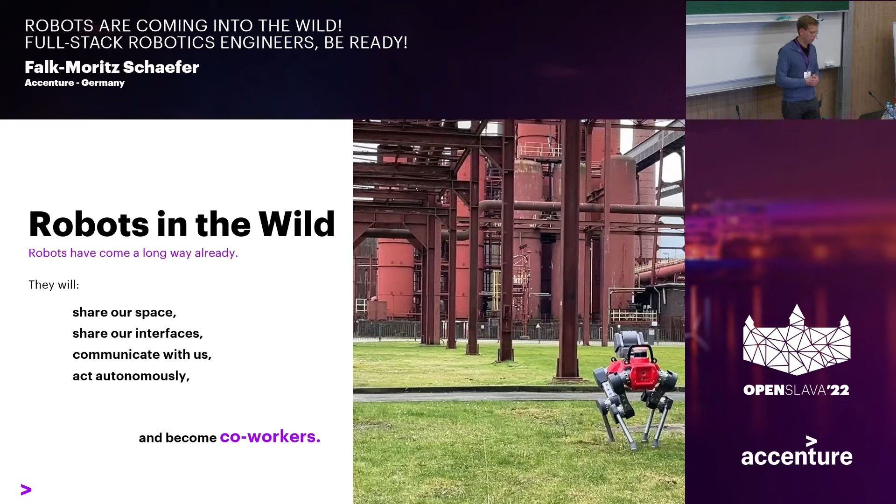This is happening across the board in what we call service robotics - robots used not for manufacturing but for services, usually where humans do those tasks today, augmenting humans rather than replacing them.

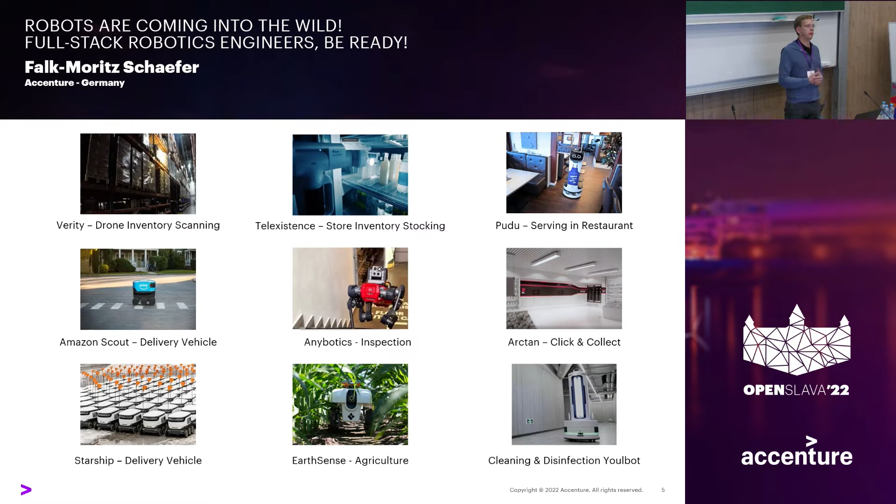So that's really substantial business and investments going in there.

And that's for one reason: from a technology maturity curve, we are just not there yet to have that reliability in the robots today to actually physically manipulate stuff. Probably you know from your own products and projects, it's very hard to engineer something to a point where it's actually ready for the real world, for real life. And that's so true for robotics.

Look at Roomba. It took 12 years to develop a very simple cleaning robot in the consumer market to that price point and that reliability that they actually hit the market nerve. And that's true in this space.

And that's also why we see the first adoption of those robots in the wild being used as a mobile sensor. This is something they already today can do very reliably, very well, moving around, getting data for increasing transparency of what's happening. And this is already powerful enough because there are a lot of tasks that are repetitive, dangerous, dirty across different enterprise application areas.

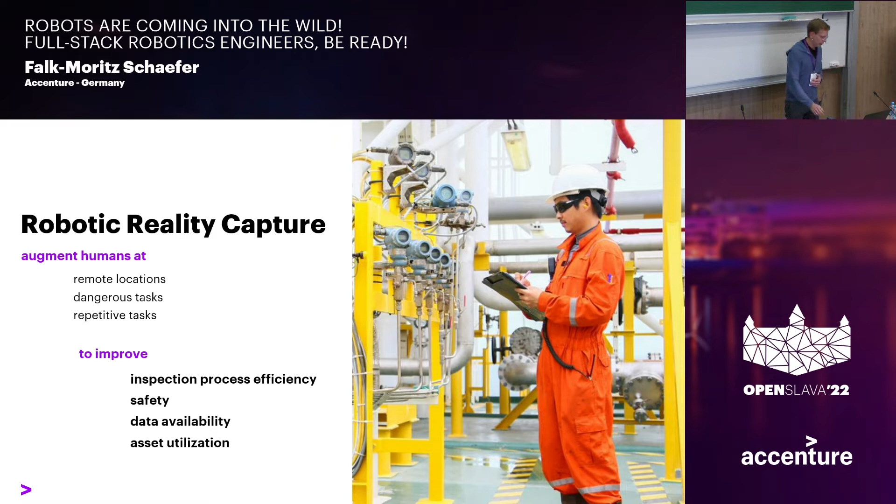So often it's not anymore the question if there is a business case for those kinds of applications, but only how to get there. And what are the tasks a robot can do in that area?

If we talk about reality capture, inspection, first of all, they can check that everything is still okay. They have powerful sensors that can go to every location at the right point in time and check that everything is still in order.

They can also read out analog devices, something that you would never retrofit to be connected or digitized at this point because those assets have been there for a couple of decades already. So they can take a look at those analog displays, read out the values, and that way you get a lot more data than before.

They can check if valves are at the right position, for example, at a chemical site. They can collect additional data for maintenance purposes, for example thermal information of heat exchangers to check if they are still efficient or need to be replaced. They can look at rotating equipment with a microphone because they have very characteristic sound profiles, and you might detect that something is going off before it happens.

And then we look at things like a plant street view, something from Google Street View, right? Having that, but on a daily or an hourly basis.

So you can do regular scans, you can explore the site without being there remotely. And then we look at telepresence, so you can have a physical eye on the ground without leaving the control room, without leaving or even traveling to the site. And safety, obviously, is very important, and security as well. They can even check the perimeter if there are intruders, or check that safety equipment such as fire extinguishers and so forth are there.

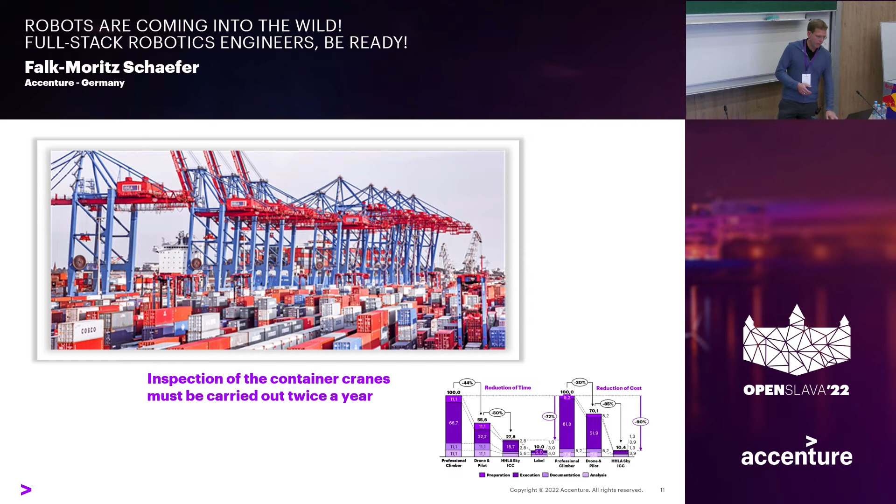But the interesting part here from a tech side is not that somebody is flying a drone and controlling it, but it is fully autonomous. And that's where we see it going. So the drones can pick up fully autonomous, find the container crane, do the inspection flight, get the data that is needed, come back and land autonomously. And we got the flight permission from the flight regulation there in Hamburg, and it's actually working, so it's a really working solution.

That's one thing. And the other thing, it's end-to-end integrated, meaning we have ServiceNow for scheduling and requesting this inspection. We have the flight operator platform where fine-tuning is done, looking at the weather, communicating with the flight regulation, and the drone operator just needs to check that all the stuff is in order, put in the new battery, and then click a button and the drone goes off.

And then Optelos for data management, so you get all the inspection data. We developed a custom corrosion detection algorithm that was quite easy because those are painted blue, so you see corrosion in red, usually very good. So that was quite simple in that case, and it's working. Then you get automatically a pre-selection of those images, and the maintenance professional just needs to look at the subset of this data and then can trigger automatically tasks for the maintenance teams in ServiceNow, which can then get their order to do this in the next week, right? So this is autonomous operation and full end-to-end integration where we see it going.

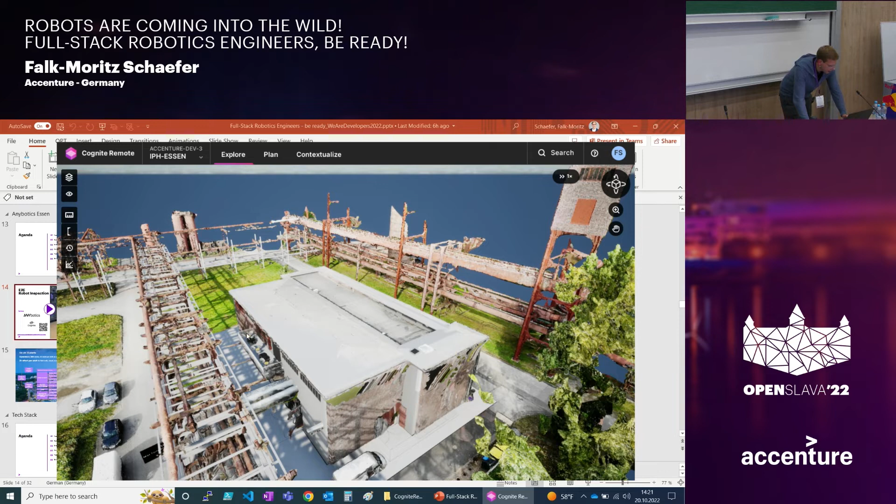And I want to show you quickly how it looks in the data platform that's connected to it. For that, I will share my screen here. So what we see here now is the Cognite data platform, and it's a 3D model of our innovation center in Essen.

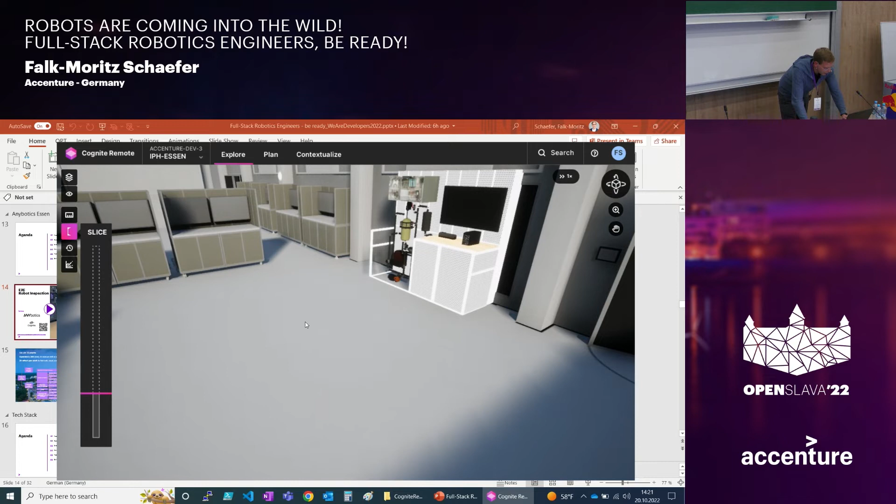So I will now zoom in to the building model, slide through it, and then go to the asset that we are inspecting. We have a little reactor here. For showing purposes, it's just water heating up to 60 degrees and cooling down again, but with all the IT systems behind that you usually see at client systems.

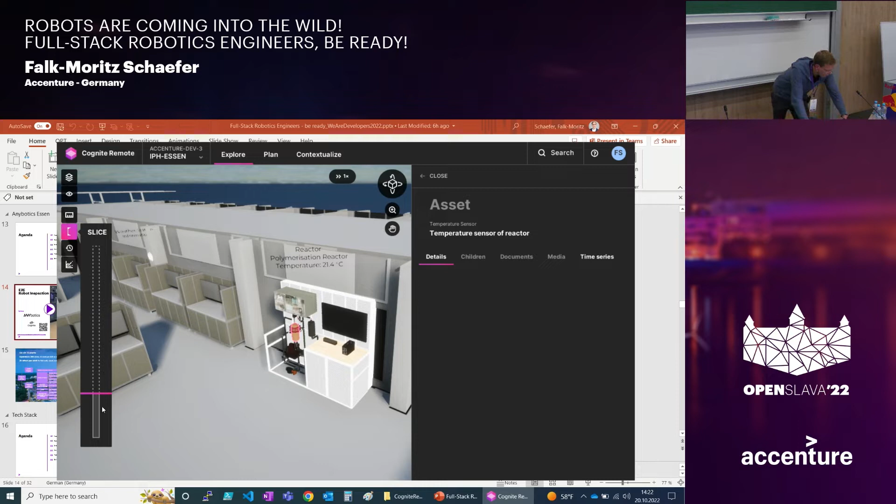And what we see here now is I can click on the model. First of all, I have an inline display of what is the current temperature. And now I'm seeing the time series, and here I have the images coming also from the robot. So there's a thermal picture that wasn't heated up yet, but here you can see a little bit this reactor, and it has a certain temperature.

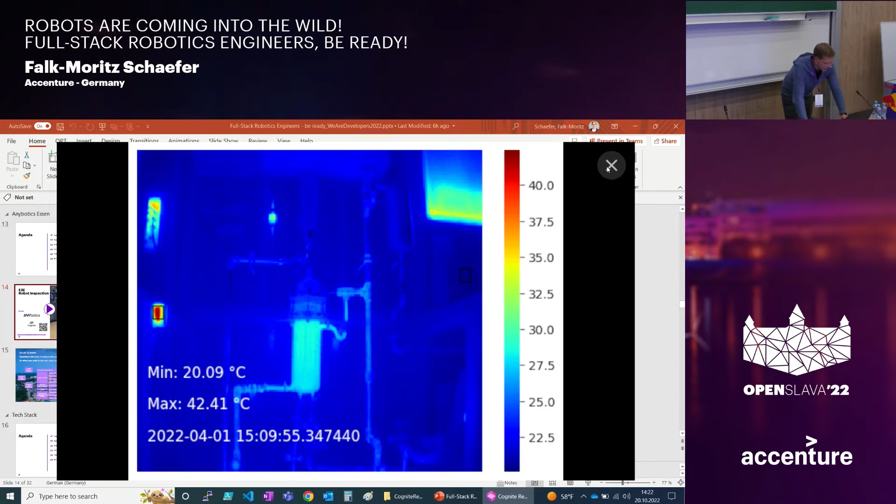Here is the PLC that's controlling the system. It also gets heated. So you have the data coming from the robot alongside the temperature data coming, in that case, from our OSIsoft historian database, where the PLC data is connected. So that's powerful stuff from the data platform side. You can connect your IoT sensor data together with the data coming from the robot.

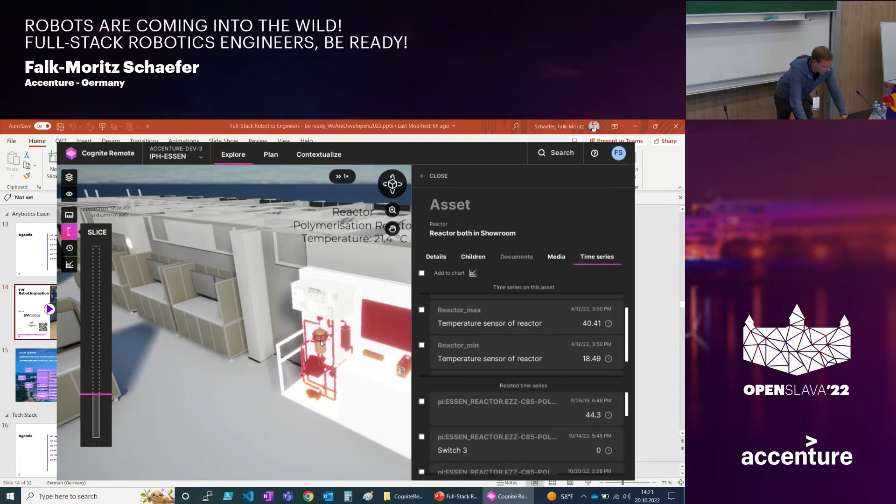And I will also show you another asset. I'm looking for the fire extinguisher, so I can search for it.

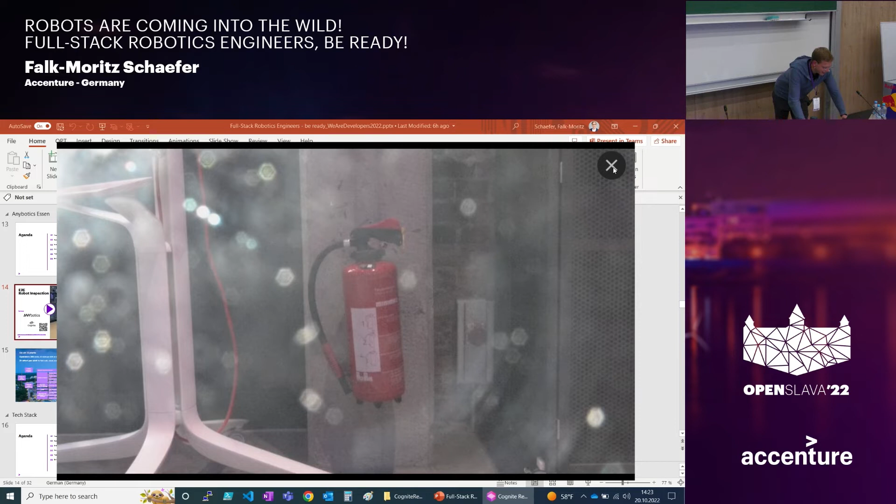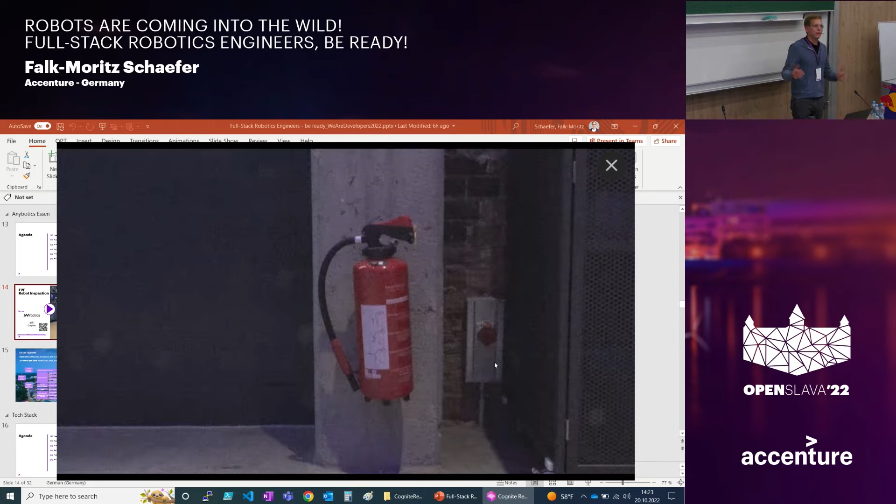And it also regularly checks that our fire extinguisher is at the right place where it's supposed to be. There were some reflections on the camera, but you can see that our fire extinguisher is where it's supposed to be, because it's an inspection point programmed in the robotics mission, and it could ring an alarm if the fire extinguisher is not present anymore. And in the 3D building model, you can also see the exit plan and also where there are supposed to be emergency exits. So that's also powerful from a safety point of view.

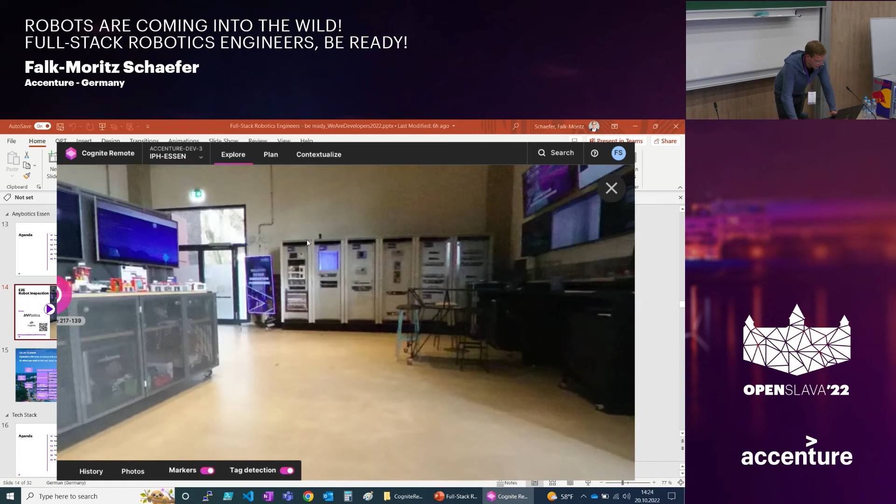And I want to show you something else. So we can also go to this street view image, and scroll into the 360-degree view in our innovation center. At that time, we went also outdoor where it was raining, and you can see 360-degree. So if you show that to people at the plant, they also immediately see, hey, that way I can find out who stole my ladder from the construction site at that corner. I see it over there.

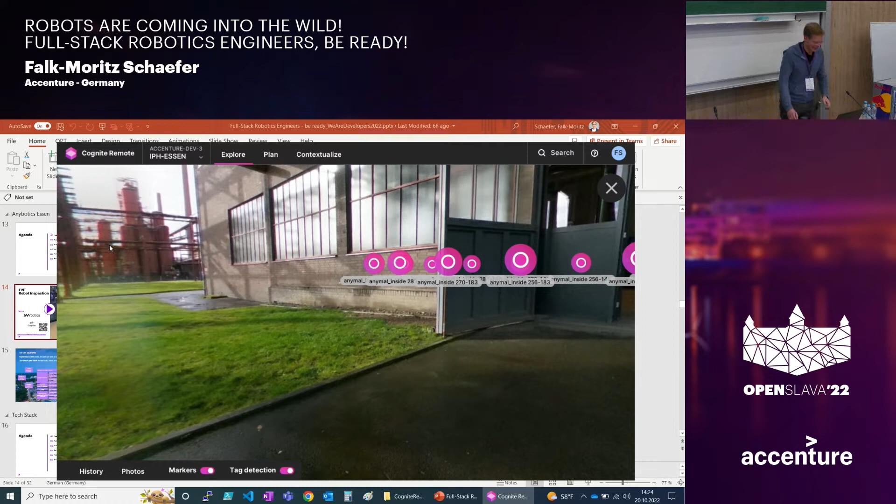But in the end, it's very interesting from the engineering side. You can merge the different models you have of such a building, of such a plant, from engineering, from construction to operations teams.

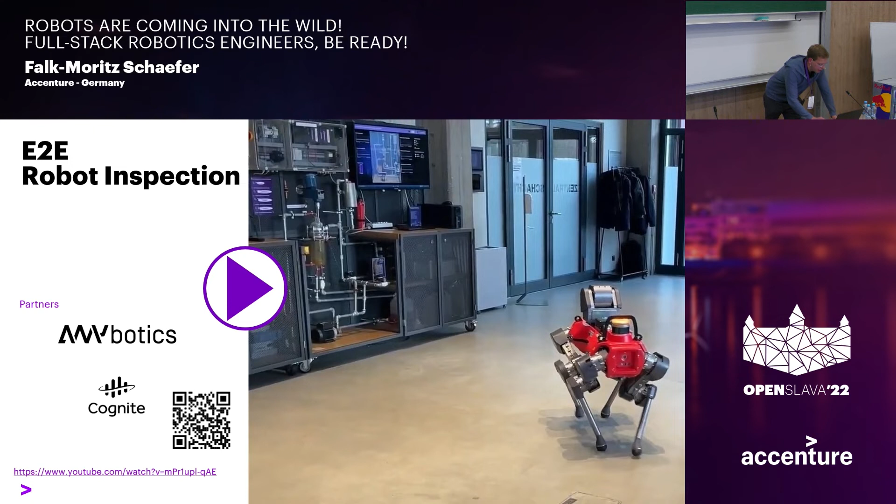Back to the presentation. And obviously, we're looking also at not only a playful tool, but what is the business value connected to it? And we looked at it not at the edge cases where you say offshore or a very dangerous task or stuff like that. But we also looked at a normal scenario, a more scaled scenario of such a site.

And we assumed we have a plant with 12 plants, in fact, that are connected. We have there 3-shift working teams, operator teams, and in every shift somebody walks around. We are saying you can save, let's say, 1.5 hours of those 2 hours of this inspection walk. And just by looking at those direct benefits of automating this physical inspection walk, we see a positive business case. And then obviously there are a lot of secondary benefits.

Just look at the labor shortage. All our clients tell us it's very difficult to find those people for those kind of jobs. And it's clear going forward, they need to do the same task with less people, and that this is the future. And imagine also what you tell somebody: hey, you need to run around the site with a clipboard and enter data, or you tell them, hey, you will be a robot operator who's making sure that the robot can do its mission, and you're supervising a couple of robots. That's a completely different talk. So that's a little bit how our clients look at it and where we see the value of it.